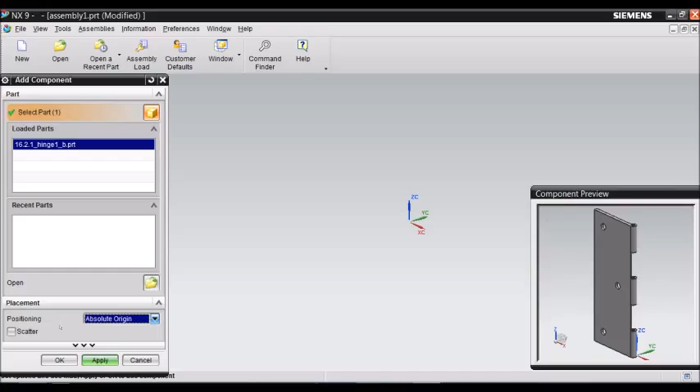We're going to add the first hinge, and we just click OK. It's really important that the first part of any assembly must be positioned at the absolute origin, because over this part is where we are going to be adding the other parts. So always the first one has to be absolute origin. And we click Apply, as you can see here.

Now we're going to add the second hinge. Here, instead of positioning at absolute origin, we're going to select by constraints. Constraints work exactly the same as if you were doing a 2D sketch. We click Apply, and then the Assembly Constraints menu will appear.

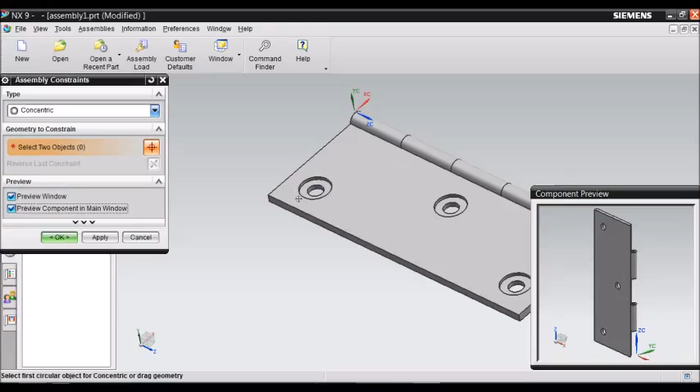If you want to see where the part that you just created is, go to Preview, click Preview Component in Main Window. It's exactly over the one that we just added at absolute origin. If you unclick, as you can see, this part disappears. If you click again, it will appear. Let's say that we select OK by mistake. What we will have to do is just constrain to place the hinge where we want it to be. So in this case, we're going to select Cancel over here.

Sometimes it's hard to place a part in an assembly even if you're applying the correct constraints. For these cases, you will need to use the Move Component feature, which is over here. You click the component and then select the parts that you want to move. For example, let's move hinge number 2, which is this one.

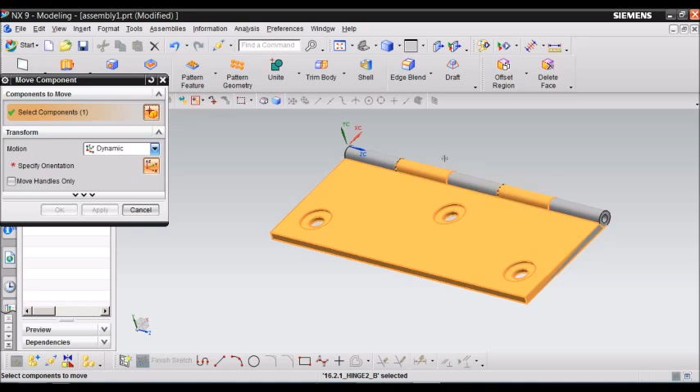Once you click this part, you go and click on Specify Orientation, and a coordinate system will appear. This coordinate system will allow you to move that part in the X, Y, and Z direction, and also to rotate on the X, Y, and Z direction, as you can see here. This is only possible if you are not applying any constraints yet, otherwise it won't move.

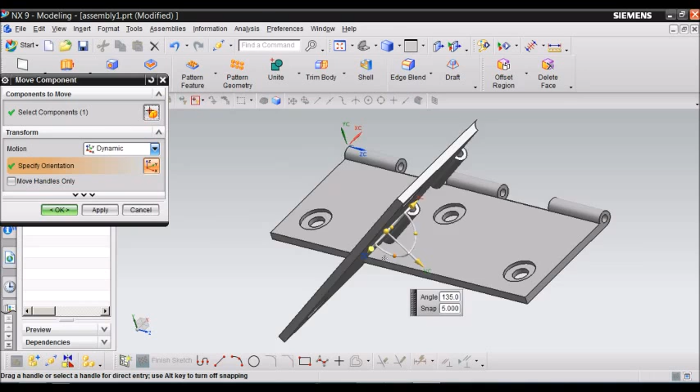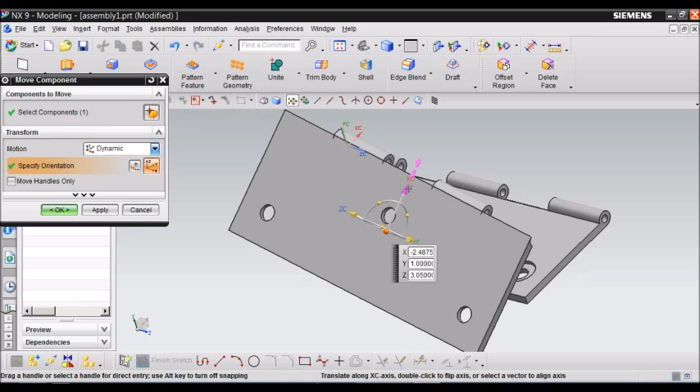In this case, we want this hinge to be on top of this other hinge. As you can see here, the part is placed almost as it should be in the assembly. So you just click OK. If you don't click OK, then whatever move you did to that part will disappear.

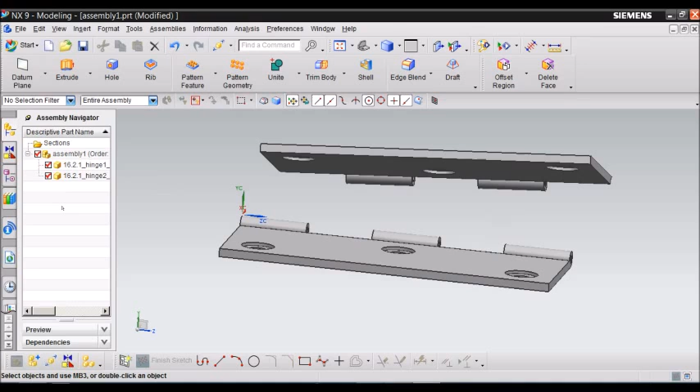From here, we go to constraints, and then we're going to use touch align. There are other constraints such as concentric, distance, fixed, parallel, perpendicular, and they work exactly the same as the constraints when you are doing a 2D sketch. In this case, we're going to use touch align. This is the most common constraint because in the orientation you can select touch, so both faces are touching each other, align, or infer center axis. We're going to select infer center axis first.

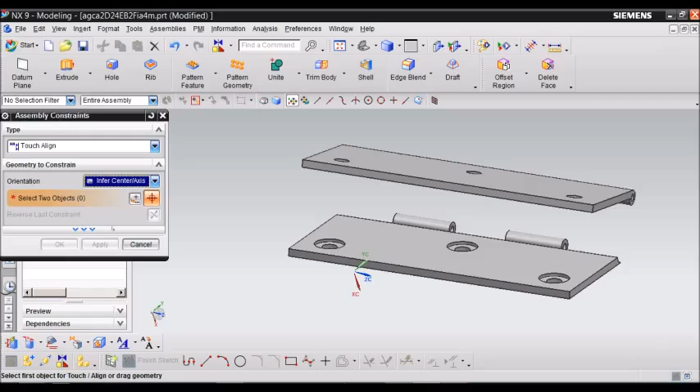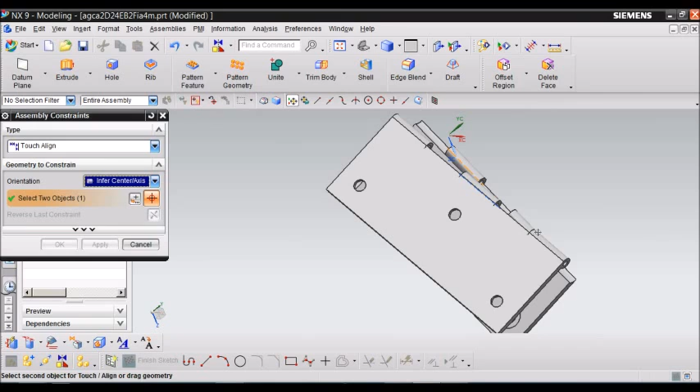We will need to select two objects. One object will be this hinge, so select the center axis; you see it's highlighted in red. And the other object will be the center axis of the other hinge. Now their center axes are aligned. So we're going to add a touch.

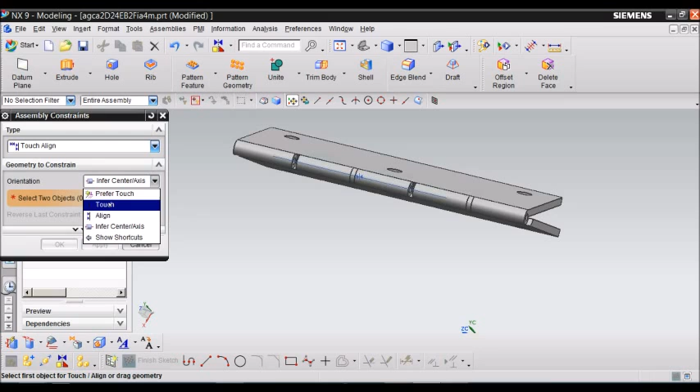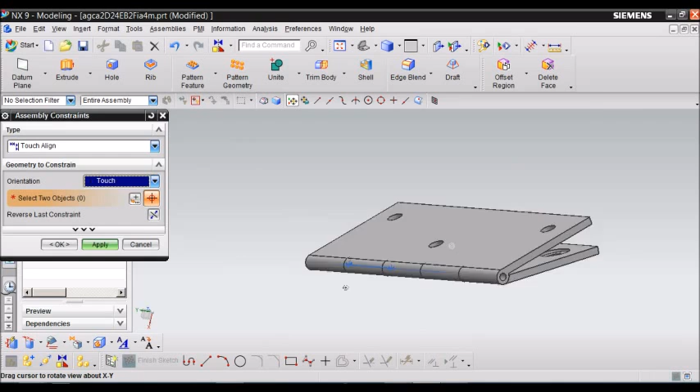Now we're going to use touch in orientation, so the face of one of the hinges is touching the face of the other hinge. Like this. And then just click OK, so all your changes are saved.

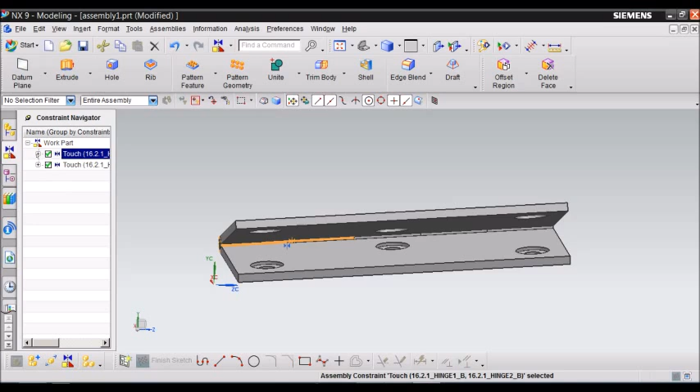If you want to see the constraint that you just applied to the model, you can always go to the Constraint Navigator. As you can see here, it shows the constraints that you have used in this assembly, and if you click this plus sign, it will show the parts that were involved in that constraint.

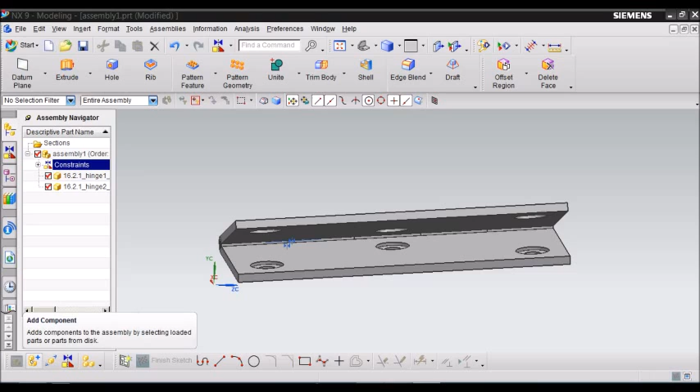Now we will add the pin to the hinge that we just assembled. So we go here to Add Component, then we open the folder, click Hinge Pin. The positioning of this pin will be by constraint also. So we click Apply.

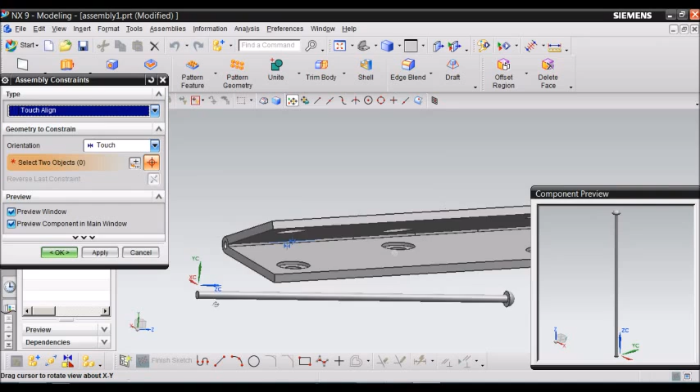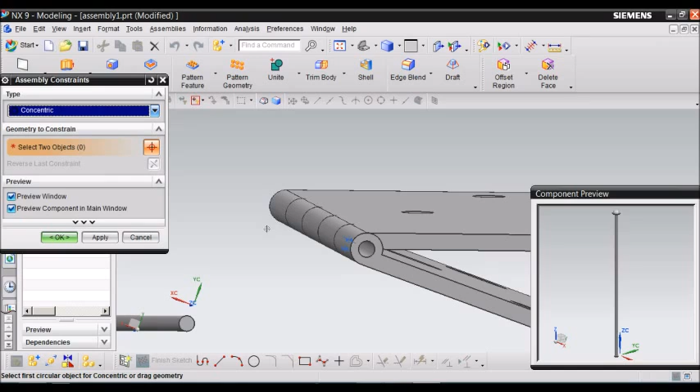Now we're going to place this pin over this hole. We could just use touch align, but we will be using another constraint. In this case, we're going to use concentric. For concentric, we need to select two objects. So we're going to select the circle of this hinge with the circle of the pin. And it will look something like this.

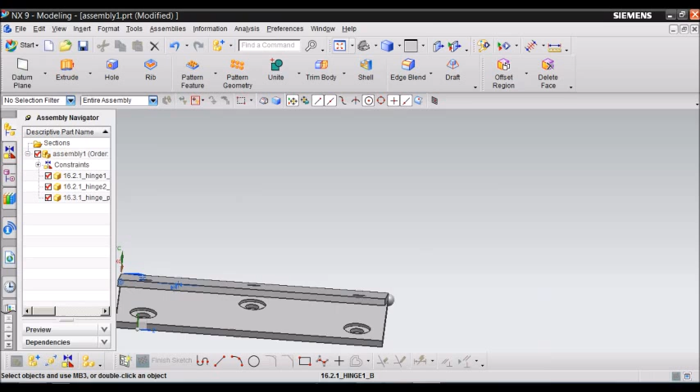If for any reason you want to delete a constraint, you can always go to the Constraint Navigator, right-click over the constraint that you want to delete, and then just click Delete.

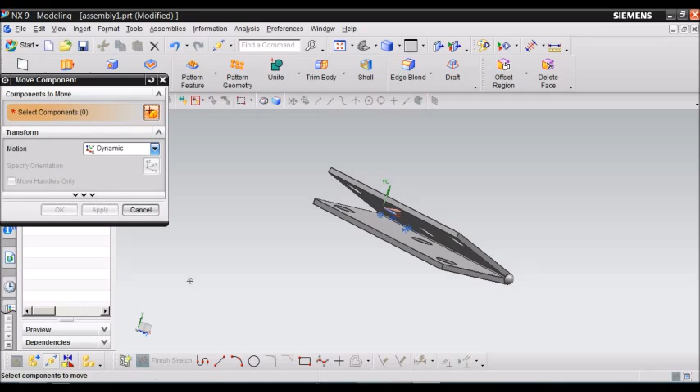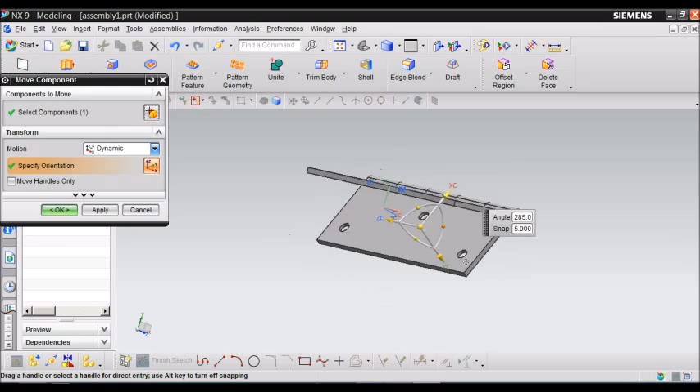To know if your assembly is correct, you can always go to Move Component, select one of the parts of the assembly, and then if you try to move that part, the whole assembly must move with that part. It shouldn't be separated. You see? Now the whole part is together.